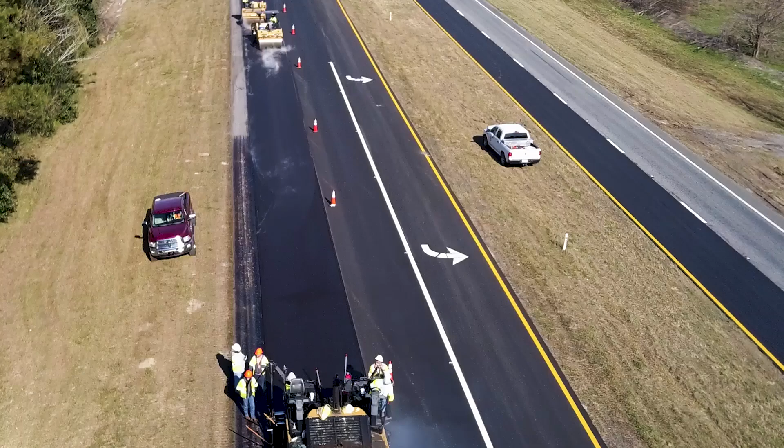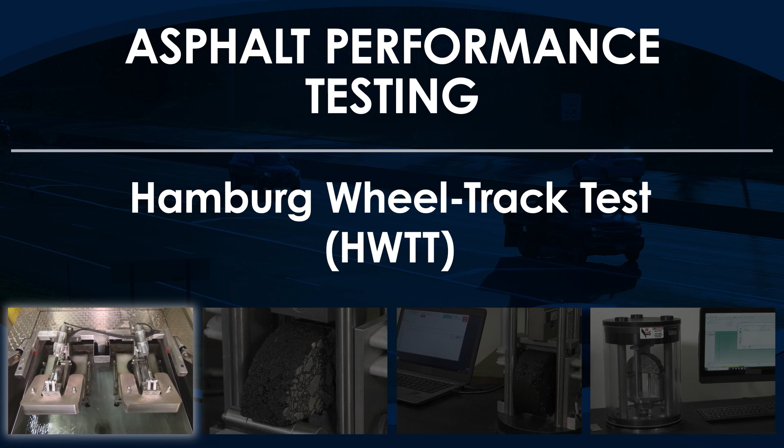Asphalt mixture performance tests help agencies, contractors, and researchers improve asphalt performance and prolong service life of flexible pavements. This video is part of a series on asphalt performance testing and demonstrates the Hamburg Wheel Track Test, or HWTT. This test determines the rutting and moisture susceptibility of asphalt mixtures using a reciprocating steel wheel testing device.

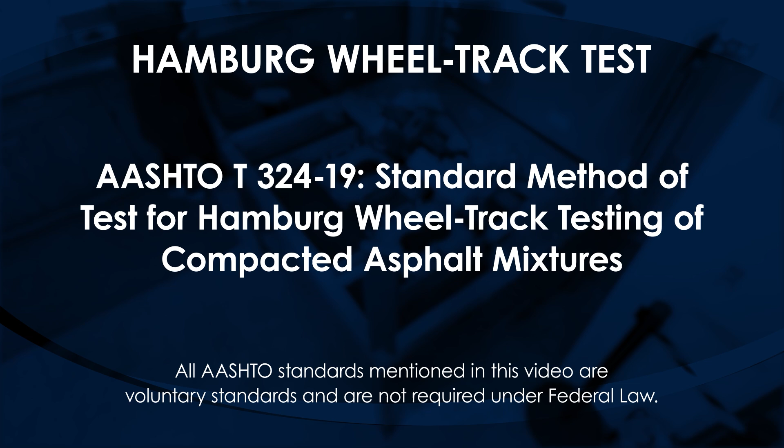The Hamburg Wheel Track Test is based on AASHTO T324-19, Standard Method of Test for Hamburg Wheel-Track Testing of Compacted Asphalt Mixtures. All AASHTO standards mentioned in this video are voluntary standards and are not required under federal law.

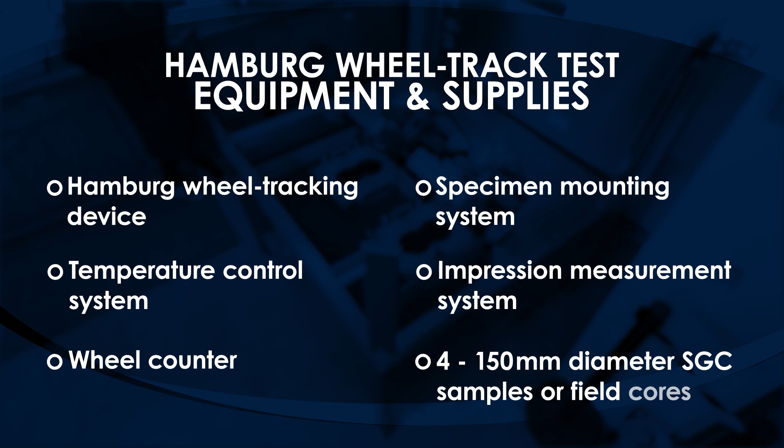Equipment and supplies needed for the Hamburg Wheel Track Test include Hamburg wheel tracking device, temperature control system, wheel counter, specimen mounting system, impression measurement system, 150 mm diameter SGC samples or field cores.

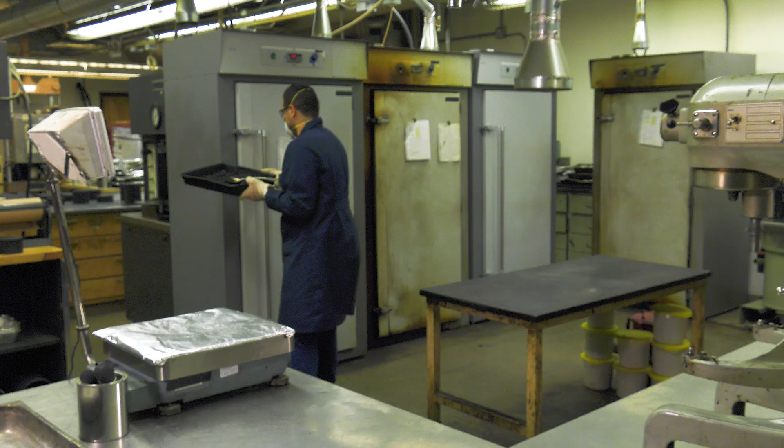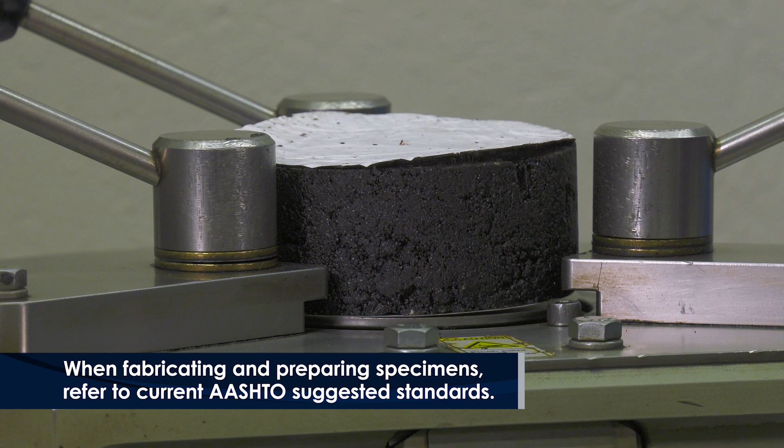For laboratory-prepared asphalt mixtures, prepare and short-term oven condition the mixture according to AASHTO R30. Compact four 150 mm diameter samples to a target height and air void content using a Superpave gyratory compactor, or SGC, as suggested in AASHTO T312. Specimen thickness should be at least twice the nominal maximum aggregate size, generally yielding a specimen 38 to 100 mm thick. Allow compacted specimens to cool on a clean, flat surface until cool to the touch.

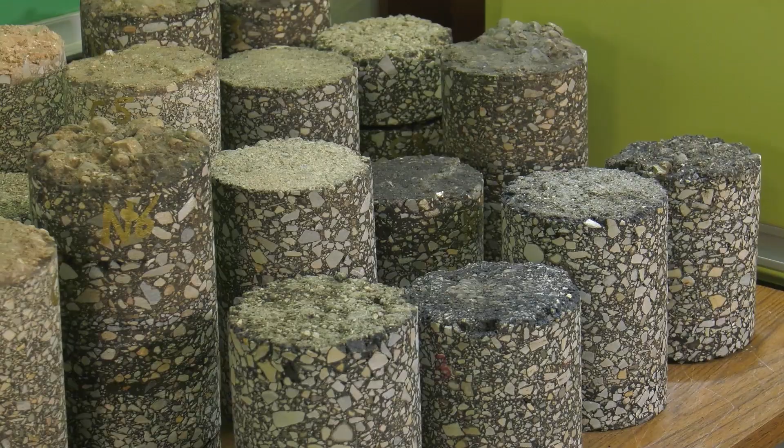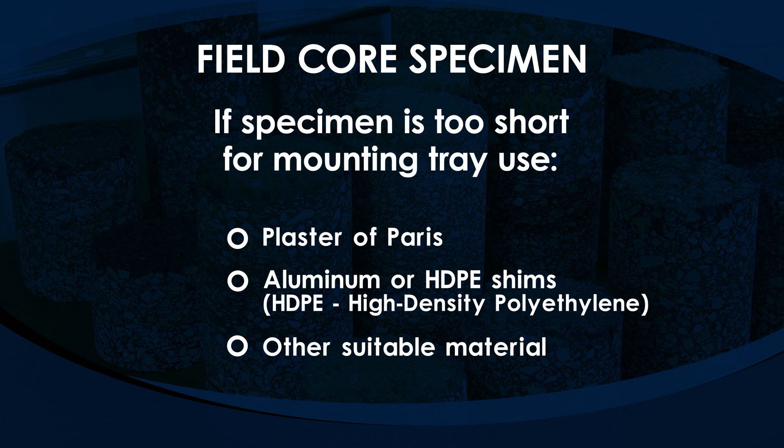Field cores are tested at the air void content and thickness at which they are obtained, or cut or trimmed to evaluate the layer of interest. If the field core specimen is too short for the mounting tray, plaster of Paris, aluminum or HDPE shims, or other suitable material can be used to fill the mounting tray. Determine the bulk specific gravity of the test specimens as suggested in AASHTO T166.

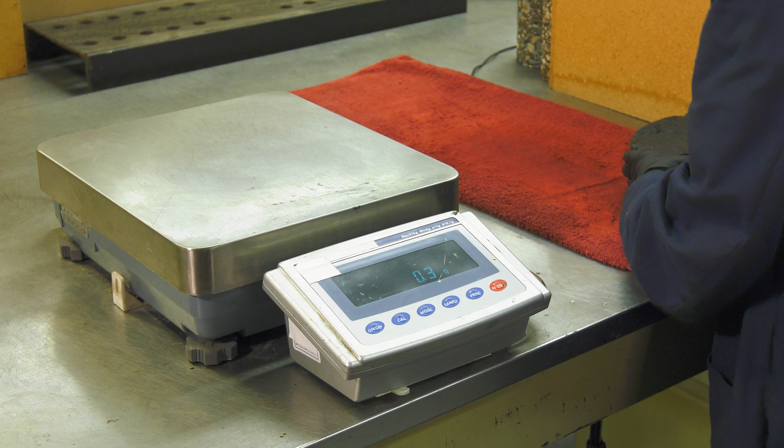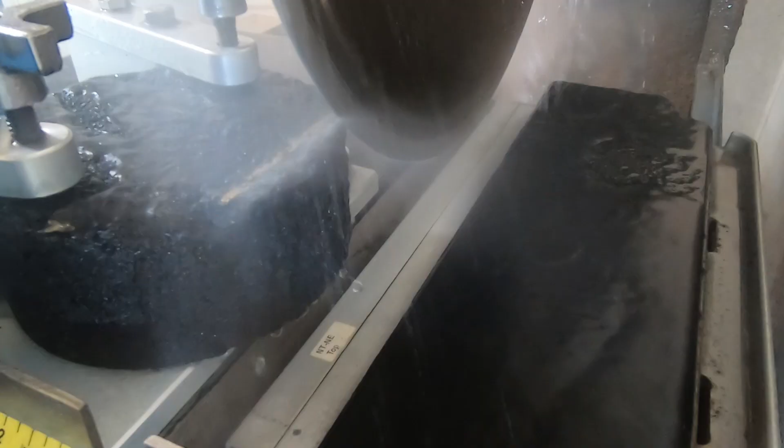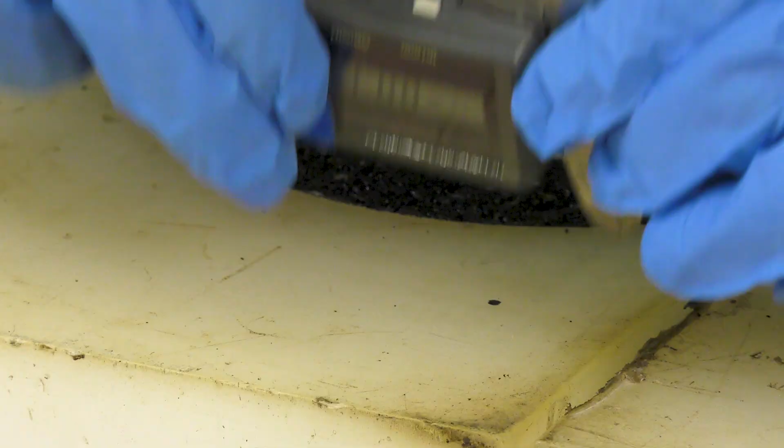Cut the specimens using a wet saw along equal secant lines or chords such that when joined together in the molds, there is no space between the cut edges. The amount of material sawed from the SGC cylindrical specimens may vary to achieve a gap width no greater than 7.5 mm between the molds. Consistent cutting may involve the use of a jig. Secure the test specimens in the mounting tray in such a way that the top of the specimen is level with the top surface of the HDPE molds.

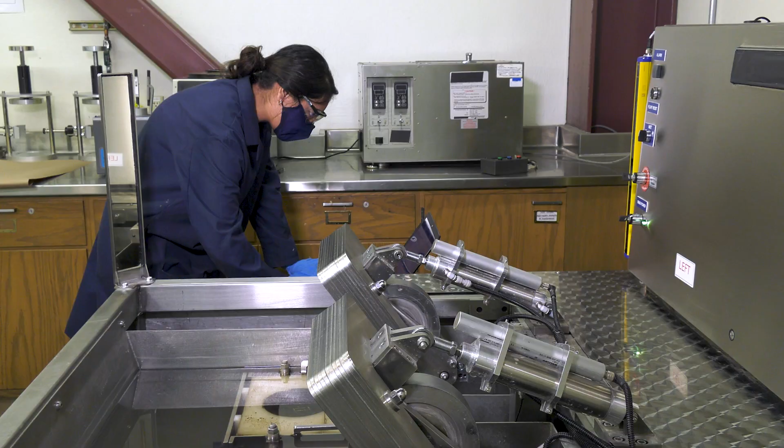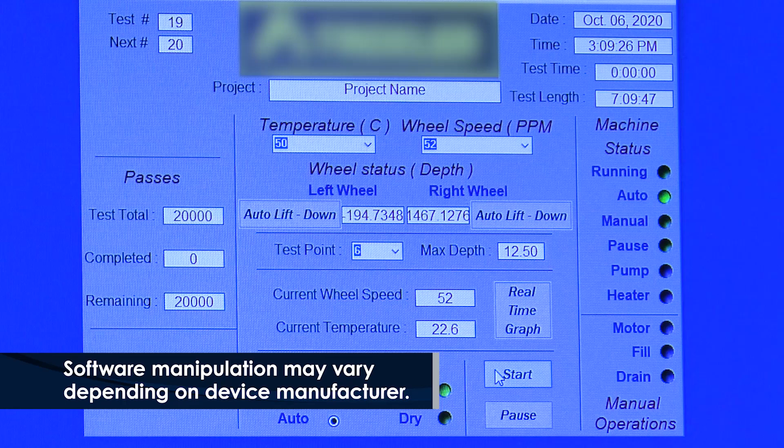Power on the testing device and all components and start the testing device software. Enter pertinent project information and testing configuration parameters. Select test temperature, allowable rut depth, and maximum number of passes based on applicable specifications. Fill the machine's water bath with water using the valves in the manual mode, or automatically if the machine can operate in automatic mode.

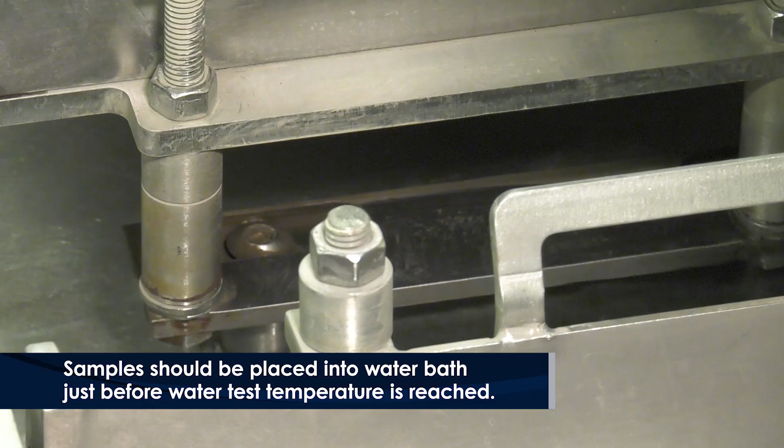Place the mounting trays with the test specimens into the Hamburg wheel tracking device. Adjust the height of the specimen tray following manufacturer recommendations and secure by hand tightening the bolts. Adjust the LDT height to obtain the height readings. For manual mode, loosen the two screws on the LDT mount and slide the LDT up or down to the desired height. Tighten the screws. Ensure the microcontrol unit's LDT reads between 10 and 18 mm. For automatic mode, follow the manufacturer's recommendations.

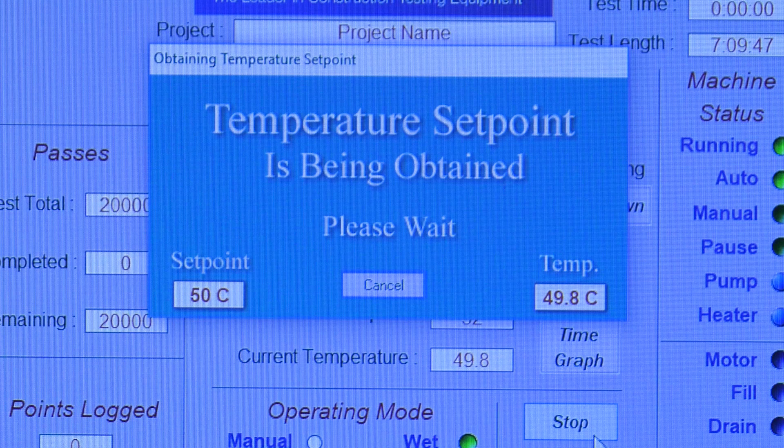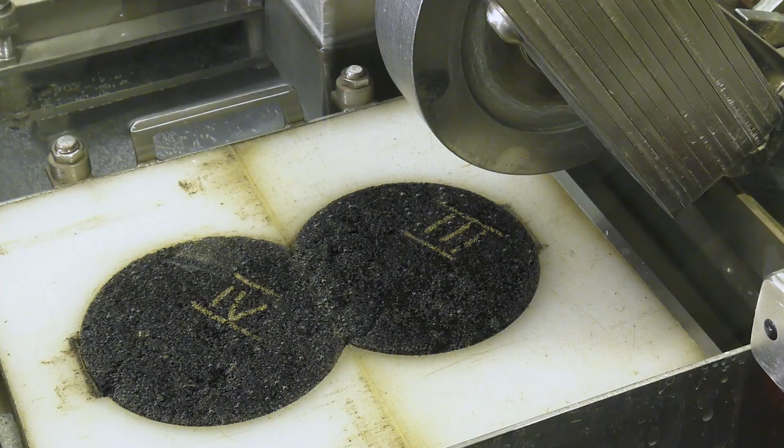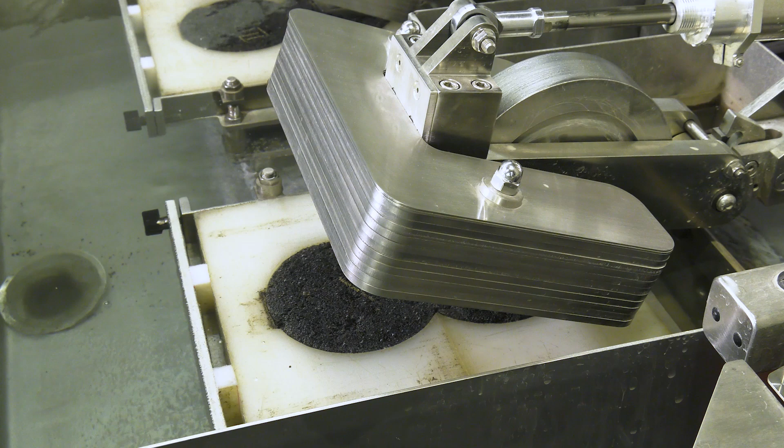Enter a start delay of 45 minutes to condition the specimens to the selected test temperature. Including the conditioning time, the specimen should not be submerged longer than a total of 60 minutes plus or minus 5 minutes before starting the test. After preconditioning, lower the wheels onto the edge of the specimens. For machines that start automatically after the preconditioning cycle, you may lower the wheels onto the edge of the test specimens such that a majority of the wheel is in contact with the HDPE molds in the mounting tray. For manual mode, click Start to begin the test.

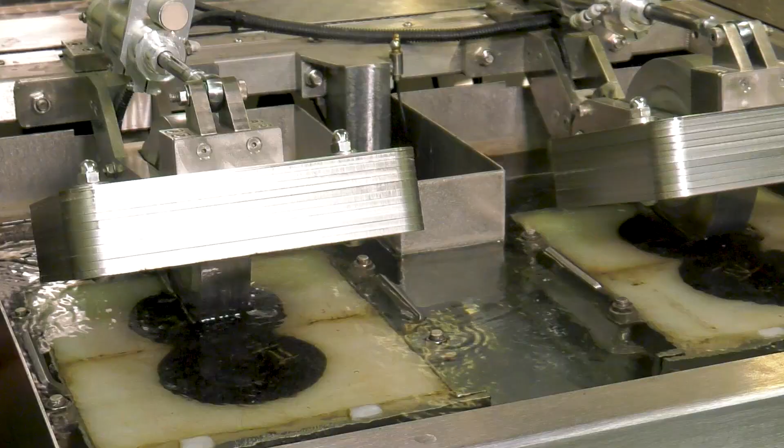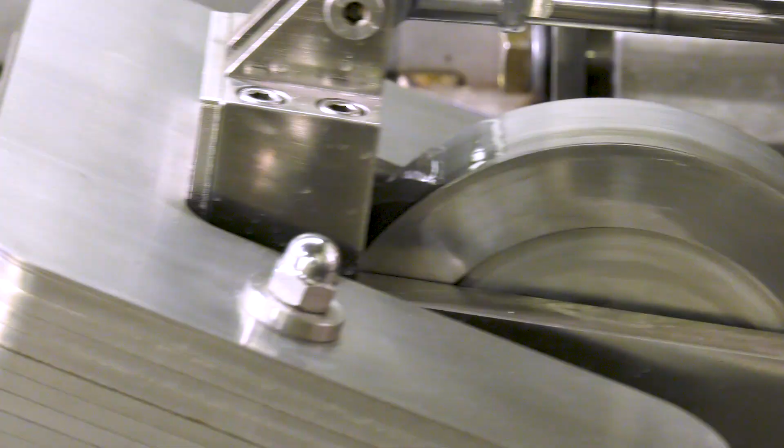Run the test for either the specified number of cycles, typically 20,000, or threshold rut depth. The test should operate with a smooth movement across the test specimen. At approximately 52 cycles per minute, a 20,000 cycle test will last about 7 hours. The wheel tracking device will stop at 20,000 passes or when the test has reached the maximum rutting depth. The device software automatically saves the test data file.

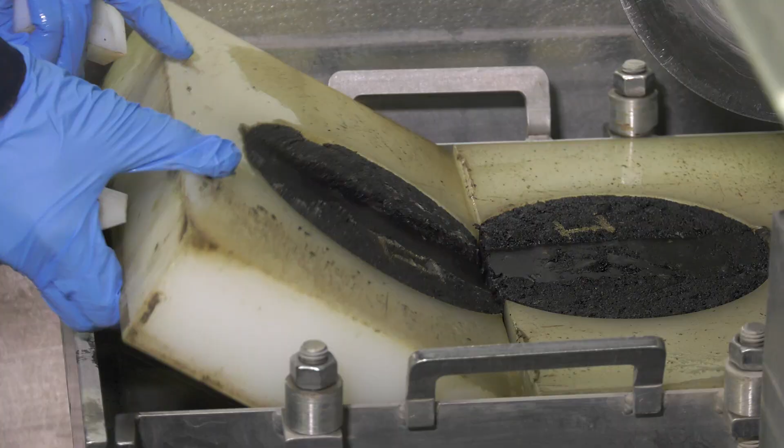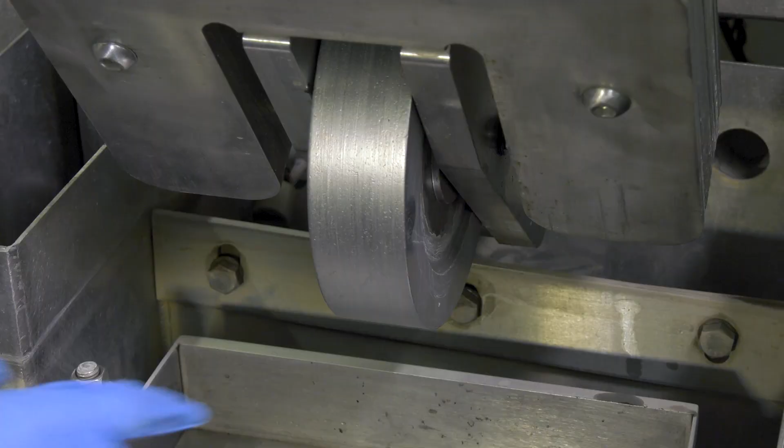After the test is complete, raise the wheels. You may take an image of the specimens in the water after the test is completed. The cloudiness of the water can often give valuable information to the data to determine stripping potential. Drain the water bath and remove the specimen mounting trays and rutted specimens. Clean the heating element, tray, and water bath according to the manufacturer's recommendations. Turn the wheels after each test, so the same section of wheel surface is not in contact with the test specimen from test to test.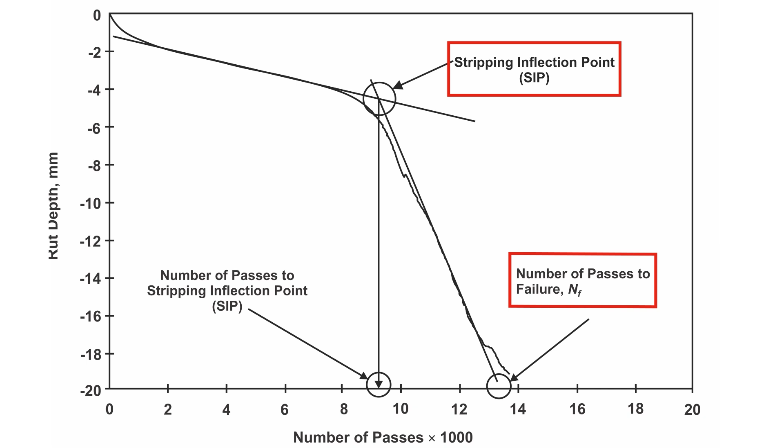Analyze the test data for number of passes to failure and stripping inflection points as described in the standard or methods specified by the agency. The rut depth can be taken as an average value of the 5 middle deformation locations. For a typical Hamburg Wheel Track Test result report, 2 sets or pairs of SGC specimens are tested, using a total of 4 SGC specimens.

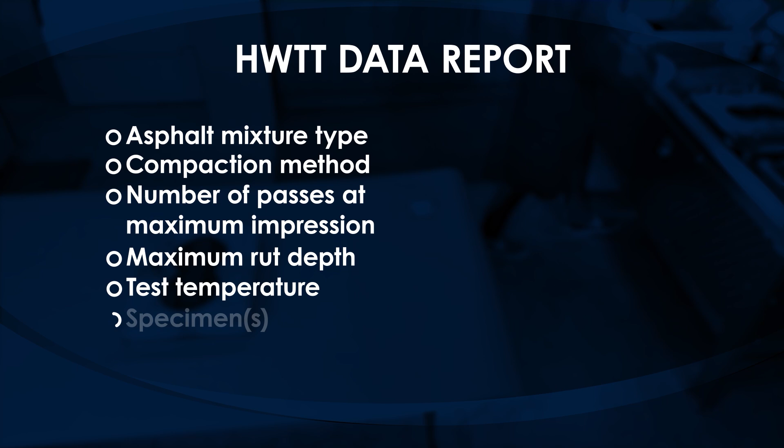A Hamburg Wheel Track Test data report may include the following parameters: asphalt mixture type, compaction method if applicable, number of passes at maximum impression, maximum rut depth, test temperature, specimen air voids, type and amount of anti-stripping additive used, creep slope, stripping slope, stripping inflection point, and device manufacturer and model.